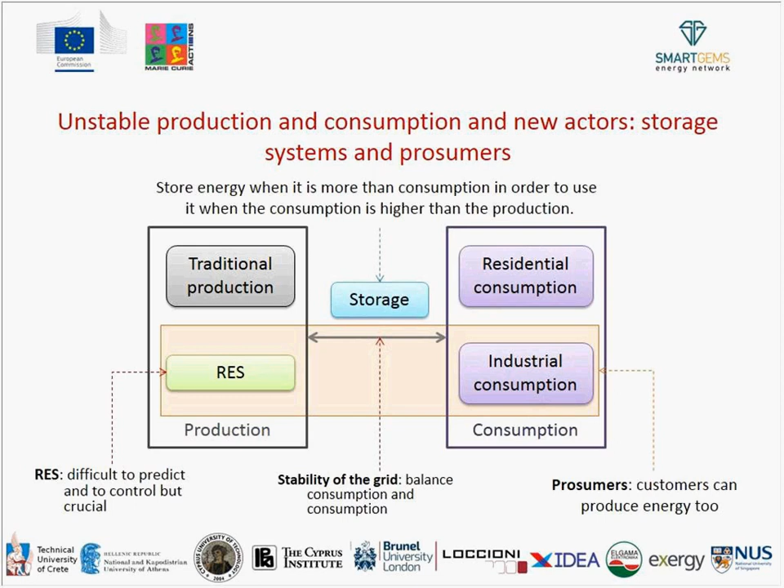There's also a new actor in this scenario, that is storage system. We are used so far to have a flux of energy, like from production to consumption. Now we have a sort of lung in the middle, so we can produce energy, we can store it and keep it, take it whenever we need. So there's a new actor also to include in this scenario. So smart grid is something that is completely different from the scenario of energy that we have seen so far. That means that we need to consider this new situation and to analyze all the actors and all the tricky situations that we need to face.

So why is it important, this operation part in the operation of smart grid? As I said before, the difficulty in planning in advance the production and consumption. Renewable energy sources, loads, it is difficult to forecast in advance. That means that it is very difficult to plan and to control in advance the generation and the consumption of electrical energy. But we need to balance consumption and production for the grid stability that must be guaranteed. And also we have this new actor, the storage system. So not only producing and consuming energy, but storing: battery, thermal storage, or hydro storage. Still, it's a new actor, this storage system.

Another key factor of this optimized operation is that we are having systems and assets connected to a microgrid that have different dynamics. For instance, if you consider a lithium battery, it is very fast. The dynamic is very fast. But if you consider an industrial consumer that is producing something linked to iron, for instance, the dynamics are very slow. But you need to control all these systems. So you are linking and connecting and controlling systems with different dynamics, and you need to include all of this.

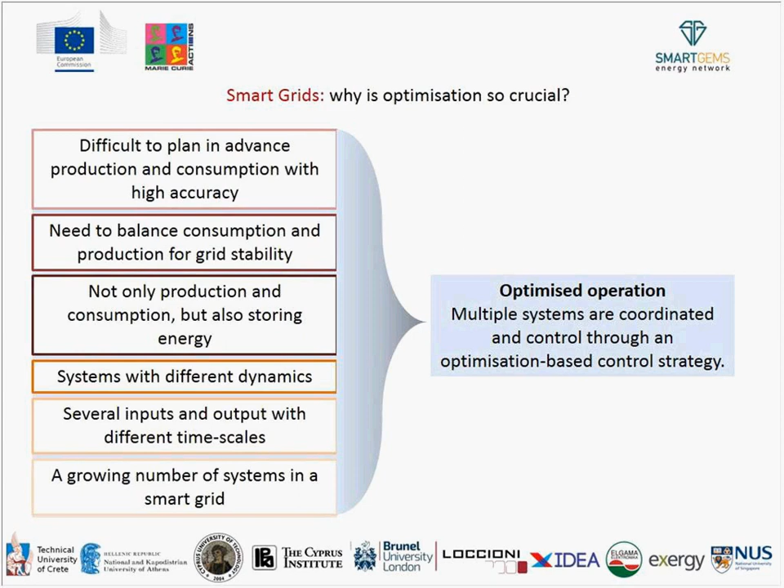So far, what have we seen from an industrial point of view? What is happening? What is the market proposing from an optimization point of view? I was at a fair 2 weeks ago in Germany, and there the focus was on optimization. So many companies were proposing optimization-based products, and these are the main areas that I've seen at the fair, and also that I've seen so far working in the company.

The first area where people are focusing a lot on optimization is, of course, trading, because they see the highest revenues, trading and bidding energy based on a pure financial optimization based on the market price. That is the first area of optimization. Why is it related to smart grid? Because you are trading energy produced or consumed by assets in a microgrid. So that's why trading is still connected to smart grid.

Then there is EMS, the energy management system. You can have it at the building level. You can have it at the grid level. That means that you can control the lighting system in a building, you can control the shading in a building, but at the same time you can control PV production of various buildings that you have connected in a smart grid. It has to be said that so far the EMS that you find on the market have a very basic optimization strategy already implemented.

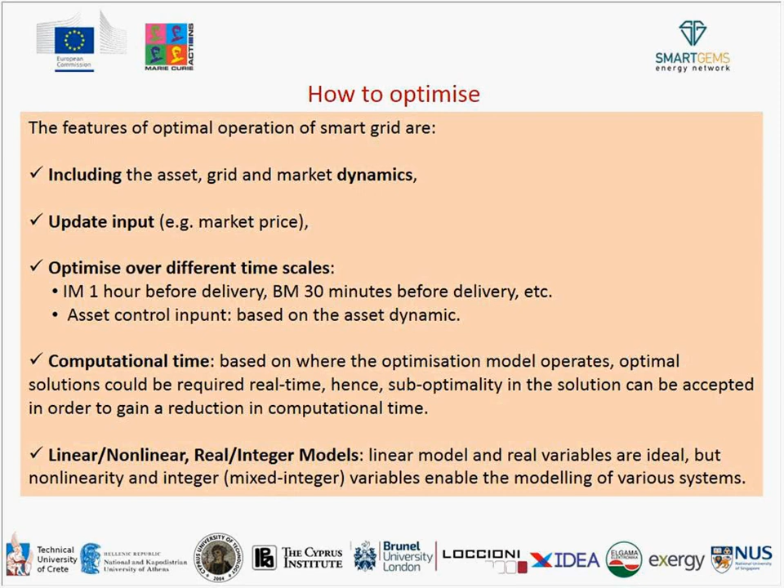At the same time, models and the variables that we are using for optimization, we are all thinking to go with the linear model and real variables, but sometimes that doesn't reflect the reality. So there are some assets that are not linear, and they require the mixed integer problem or integer variables, and that must be considered in the design of the optimization problem.

Modularity and flexibility again. We must be able to easily add and remove assets and constraints from the optimization problem. Reliability must be guaranteed no matter what, must be provided to the customer, and the control system must take care of this part.

There are also a few other considerations, related to a fully decentralized versus a centralized control strategy. That means that you can decide to control all the assets of the microgrid in a fully decentralized way, without a master control system but with a set of decentralized controllers. That can be done. Or you have a master that controls all the assets in a fully centralized strategy. It depends on the number of assets. It's still an ongoing debate in academia, but these are two areas to consider in designing an optimization control system for smart grid.

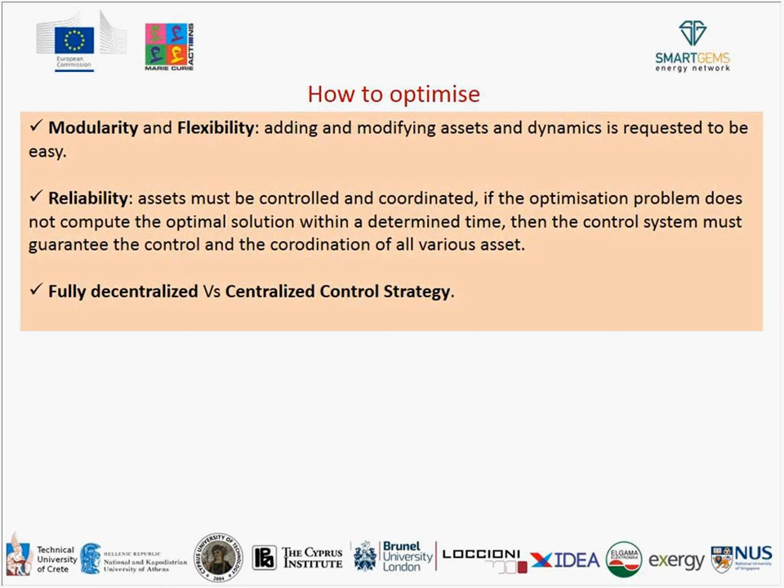That was an example that we have made here in Loccioni, just to show how you can integrate the market. In the optimization module that we developed internally, we were taking a real-time price from the energy market, updated every 1 hour. Then we were forecasting the customer imbalance volumes, and also the balancing market prices every 30 minutes.

So the idea here was to provide an optimal control signal to the assets that we were controlling, and also information to traders. We were not simply controlling the battery, but providing information to traders, something like, okay, if you bid this amount of energy now, you're going to earn X euro, but if you do that in 1 hour, our forecast suggests that you might earn something more or something less. So the final decision was taken by the traders.

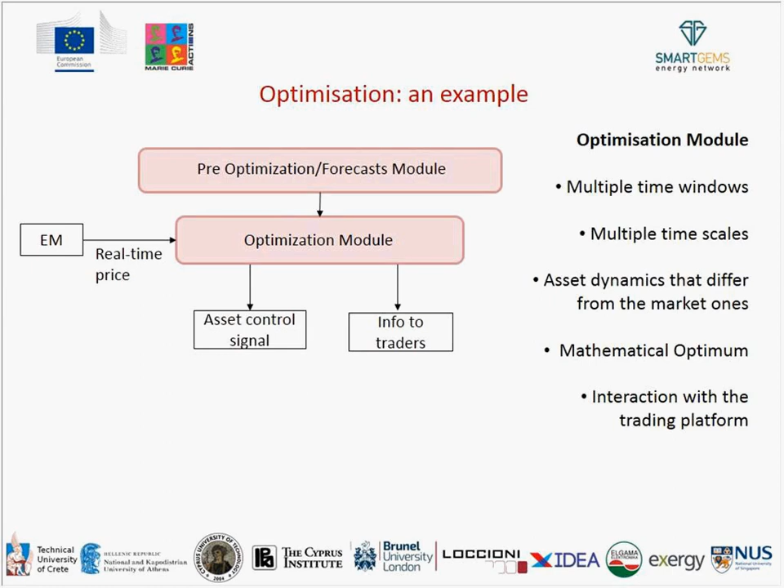And that's also a key part of smart grid. I'm going to talk about it in the next webinar, because humans and the interaction with humans must be guaranteed and taken into consideration when designing the control system for a smart grid. So the conclusion is that optimization is very important, and at the same time, reliability and stability must be guaranteed, along with fast computation, modularity, and flexibility.

Academia is focusing a lot on this research area of optimization. The drawback is that sometimes we tend to have a too complicated problem that requires too much information at the beginning that customers simply do not have. They don't have the faintest idea of how to get this information, and they are not willing to look for it, especially when they don't see an immediate return on investment.

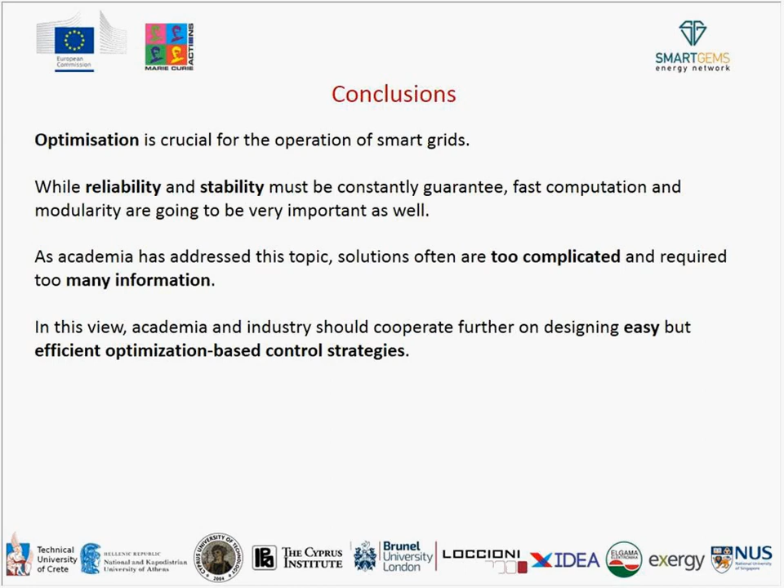I will continue this presentation by focusing on demand response as a prominent field in the smart grid concept, in the sense that it is a valuable tool and attracts a lot of interest from stakeholders on the policy and market side, and of course in research. We will see that quite a lot is being done in this direction, with some EU member states having made considerable progress and others still lagging behind. The aim of this part of the webinar is to provide the wide general picture of demand response and not a deep insight into the electrical energy market.

As in SmartGEMS we are more focused on the demand side management, but I think that it is important at the same time we acknowledge why demand response is valuable for all key market players. And questions like what is demand response and why demand response will be answered before going through some of the EU regulatory reforms and how they are gradually being reflected in various legislative acts. So primarily we will try to draw upon the actual progress of demand response in terms of the technical framework, but also we will describe some of the new business entities already developed in some countries.

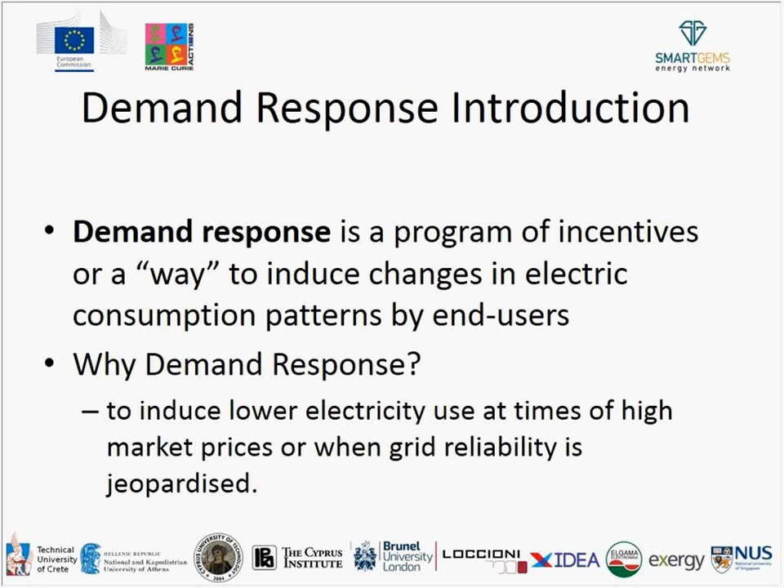And there are quite a few challenges ahead for the smart grid, and one of them is the penetration of electric vehicles, which, according to some estimates, could increase the peak demand by up to 40%. There is electrification of heat, which is another critical issue, and of course, increasing renewable energy sources engagement, and this creates volatility that utilities should deal with.

Unfortunately, here this graph is not working properly, but what I meant to show you is that this is a curve, the net load curve for California in January 11. We could see the difference between forecasted load and expected electricity production from variable generation resources. So in other words, this curve shows what the independent system operator must follow during the day, and it can be divided, as you see, in 4 segments, starting from left to right.

The first segment is an upward ramp of about 8,000 megawatts, and it occurs in the morning starting around 4 a.m. as people get up and prepare for their daily schedule, and goes until 7 o'clock. And then we have the second segment in the downward direction, which is sometimes described as the belly of the duck. The first segment is the tail of the duck, the second is the belly of the duck, and as we see, we have this in a downward direction, and it takes place after the sun comes up, just after 7 a.m. in the morning, when conventional generation is replaced by supply from solar generation resources.

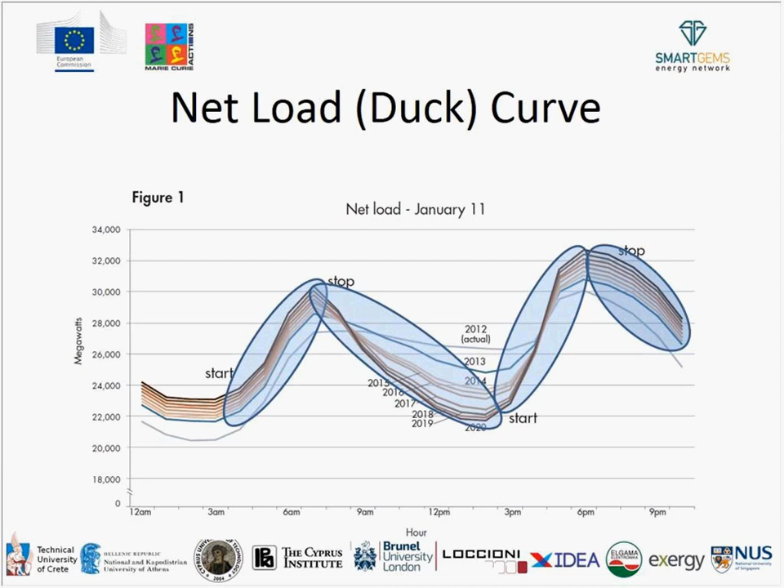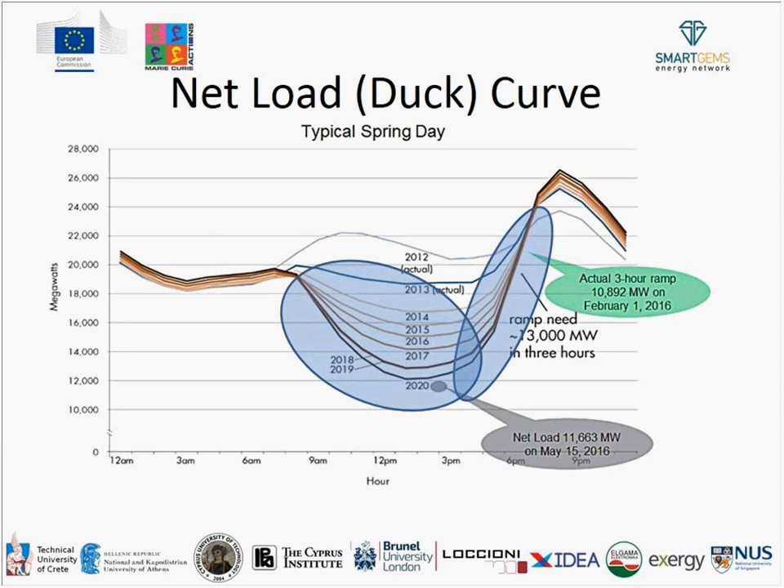And this is another example from spring this time, and again we see that according to the forecasts going to 2020, there will be a very high gap that the operator needs to fulfill as renewable sources are being increasingly connected into the grid. So the belly of the duck, let's say, goes down to a lower point. So the second ramp in the upward direction becomes wider. In this case, I'm not sure if the peak increase due to electric vehicles has been taken into account, but this is something that could make this gap even higher in the future.

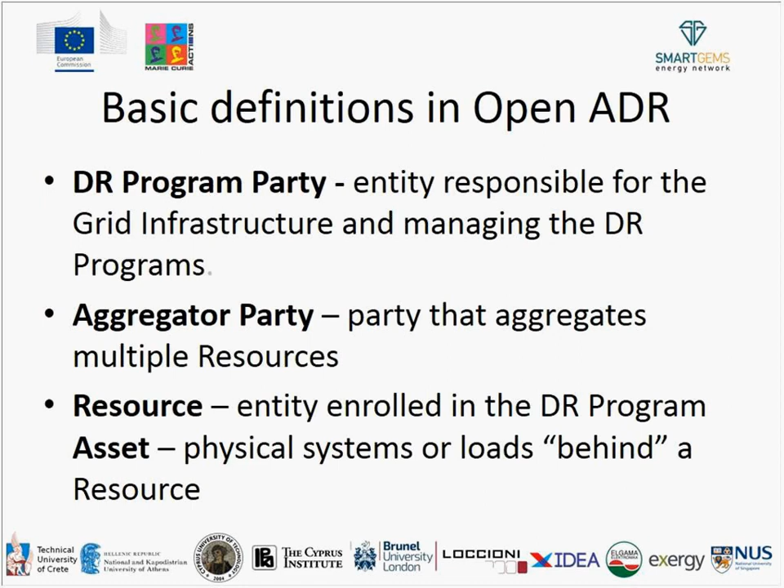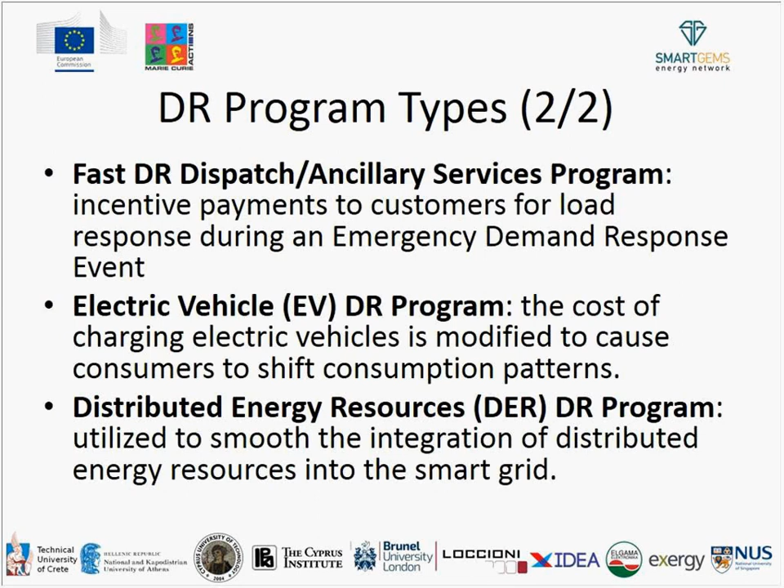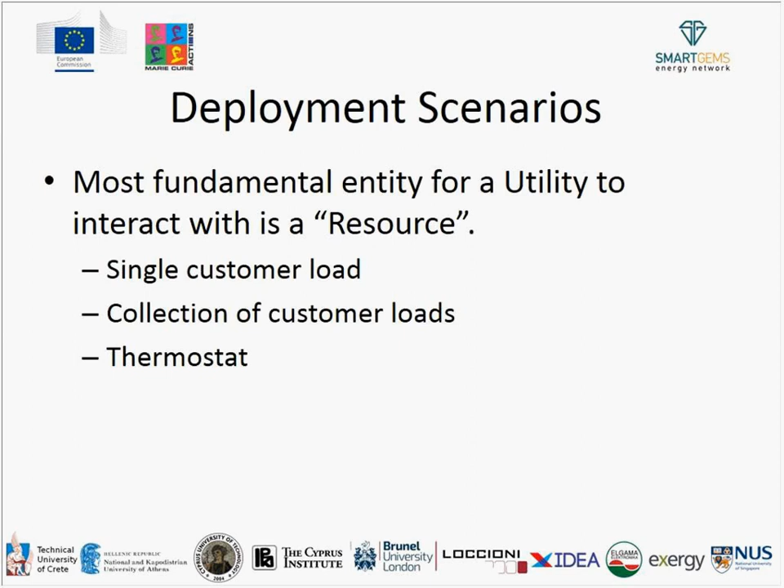In this effort to standardize, let's say, communication for demand response operations, various program types have been identified, such as critical peak pricing, capacity bidding program, thermostat program or direct load control, fast DR dispatch, which is about customers' response in emergency events, electric vehicle programs, and distributed energy resources programs. And of course, the most fundamental entity for a utility to interact with is the resource, which could either be a single customer or a collection of customer loads, or even a thermostat.

And this is a simple deployment scenario between the Demand Response Program Party and the Resource Party. So we have the Resource Party responsible for enrolling its own resources into the Demand Response Program, and the grid infrastructure then, via a communication node, which here is called VTN, Virtual Top Node, interacts with another communication node that resides in the demand side infrastructure. And examples of this scenario would include commercial and industrial buildings that may install a gateway, and when a signal is received, it's simply translated into some other protocol and forwarded to the load controllers, the building management system, or the energy management system.

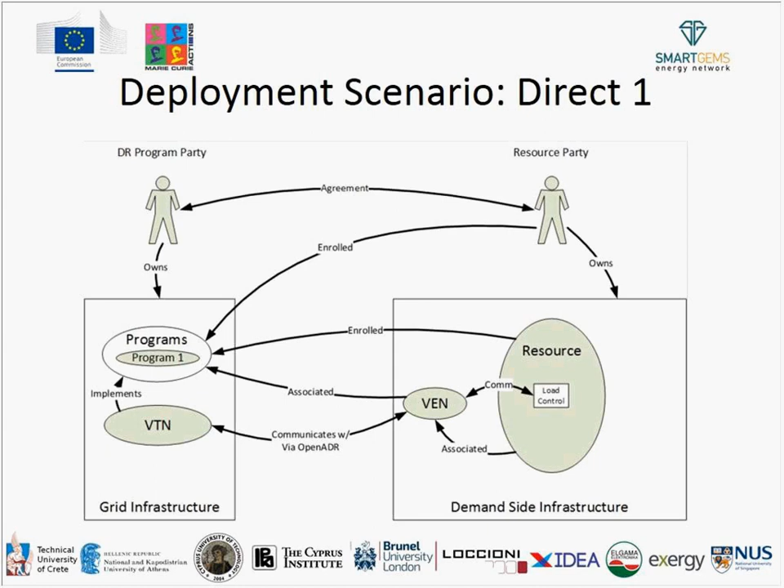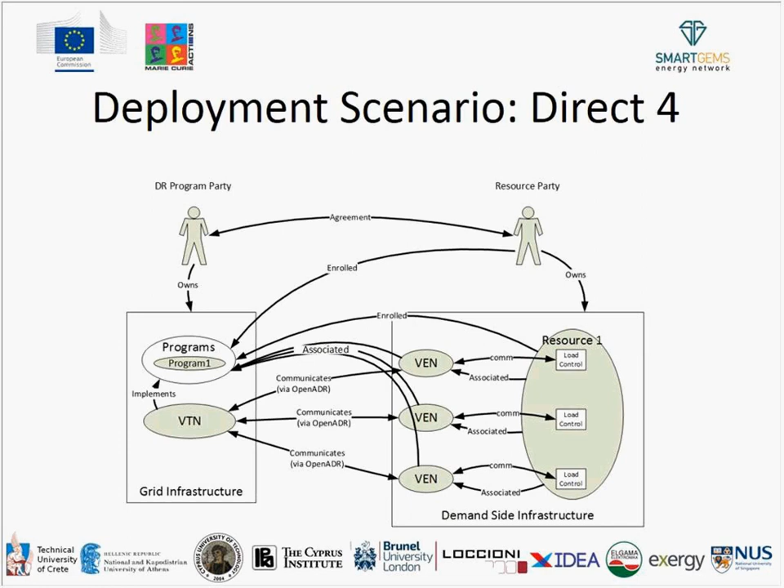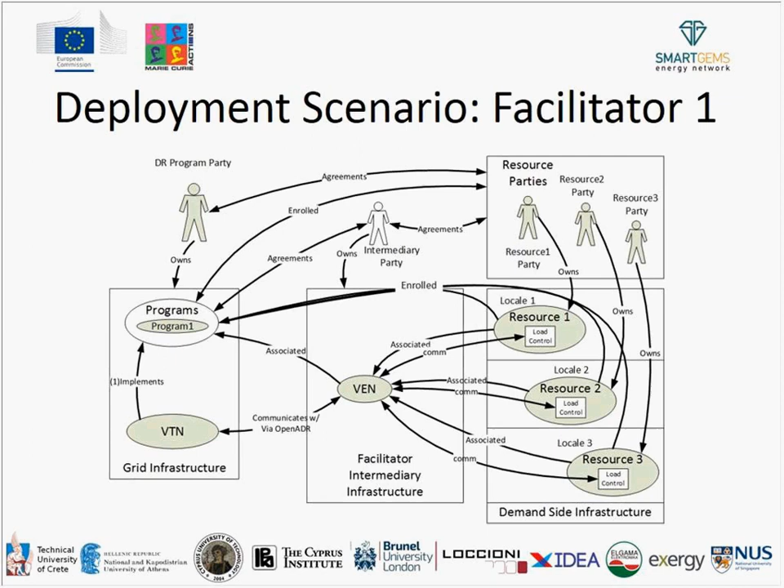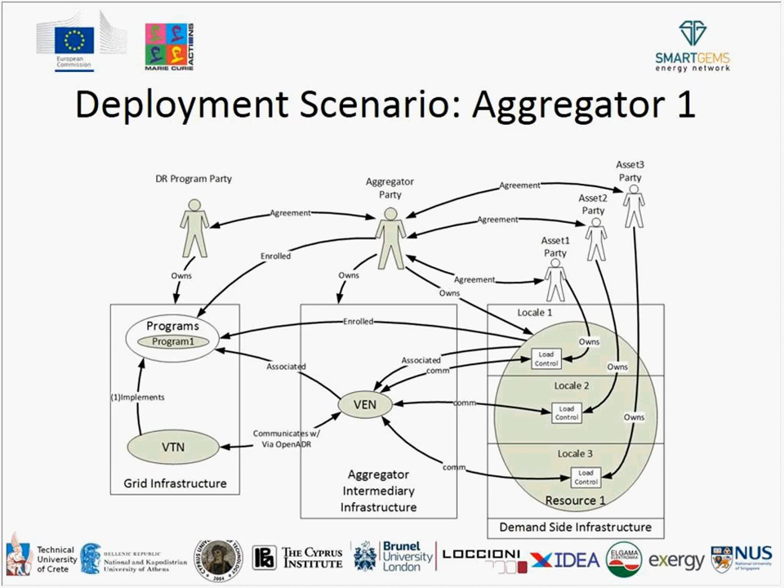Okay, as a conclusion, demand response offers the technical and regulatory framework for higher efficiency, inclusive participation, and operational transparency. And there is a lot being done in this direction. Research, innovative products, market-oriented efforts, and targeted policies which gradually drive electricity markets closer to more elaborate and wide-scale demand response in the foreseeable future. This is where my presentation ends.

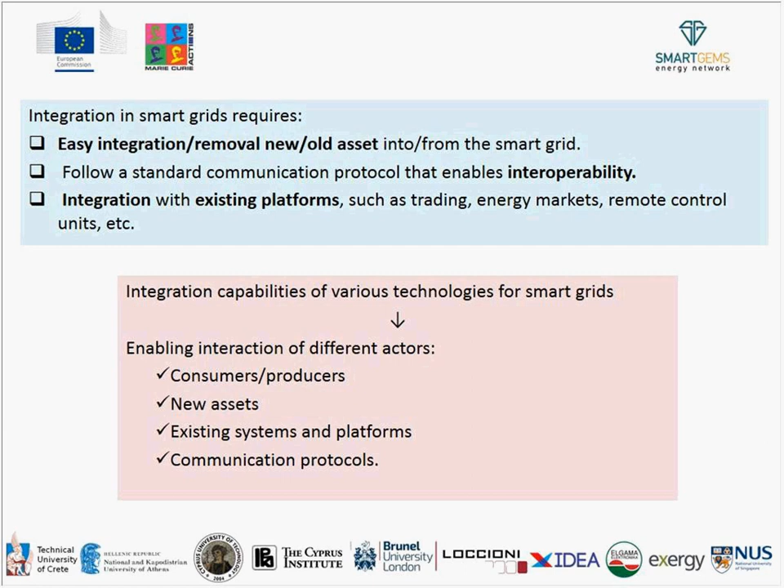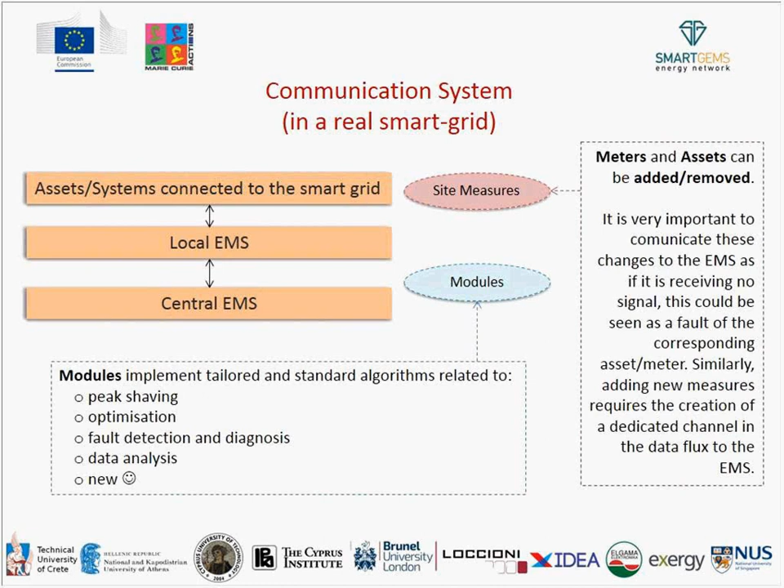Second level, local EMS, battery management system. These are the management strategies that are implemented at asset level, locally. And then there is the upper level, the central EMS. From the website, remotely, you can control the microgrid, you can select the control strategy that you want for the battery, for the hydro production, or you can perform a data analysis, you can integrate with the markets, you can integrate forecasting too, and this has been developed internally by Loccioni.

So it is very, very flexible, modules can be exchanged from central to local very easily, and it can be accessed from web, but also from mobile, so from a tablet or a mobile you can have access and control the assets of the microgrid.

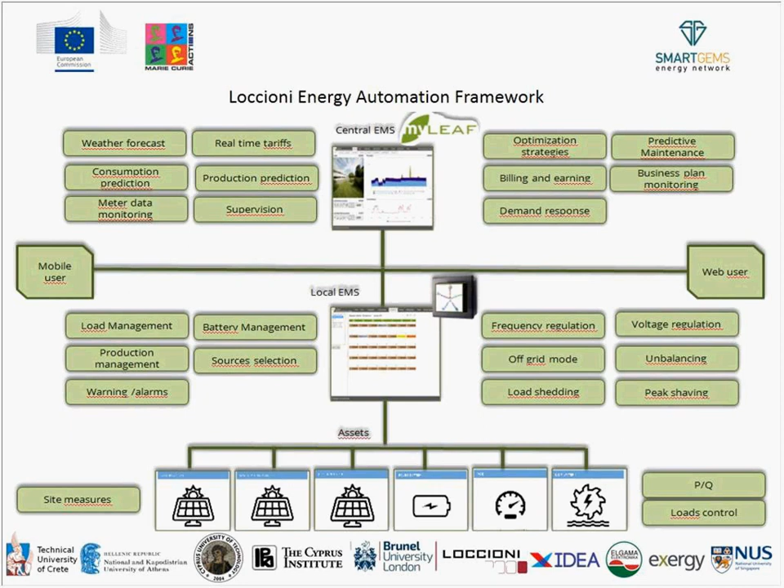So far, which kind of integration capabilities, let's say, which kind of knowledge is requested in this phase in the communication system? Of course, a good knowledge in ICT, information and communication technology, in coding, because the framework has this structure also on cloud, so coding is very important.

You need to know the hardware, so the meter that you are installing, and also electrical and thermal equipment. You cannot measure something if you don't know how it is done, because there might be a risk that you are going to install a meter in the wrong part of the heat pump or the boiler or the battery. So you need to know what you are going to monitor and to control. So these are the main competencies that are requested at this stage of the integration, that is the communication part.

Then we have the control system. We need a control system to control all the assets and to coordinate. We can use the optimization-based controller we have seen before. We can implement demand response. It would be at this phase of the integration.

We have the EMS that has been developed internally by Loccioni. That means that we can, for instance, control the battery for peak shaving. We can use the battery for increasing self-consumption. We can go on island mode. We can use the thermal storage to store energy during weekends and use it during the weekdays.

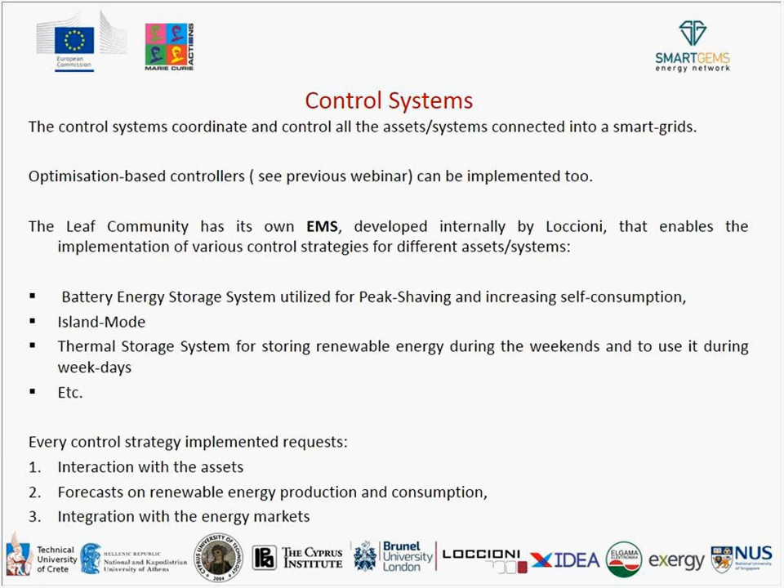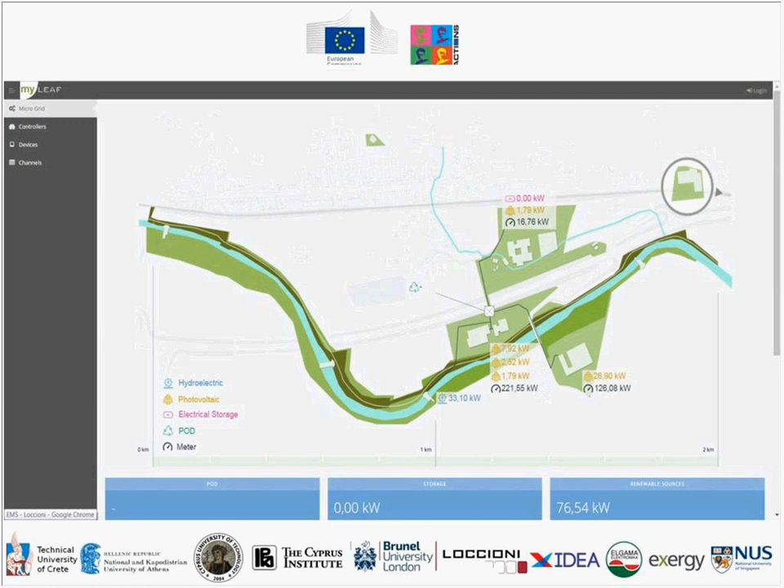And another aspect, as Nicholas also mentioned before, is the role of aggregators. That's something that must be included in the design of the control system, and it is very important in the area of integration. Imagine that we have n systems in a microgrid or smart grid. There might be traditional production, consumption of a house, of companies or industries, and then we have batteries, for instance. Instead of having n systems, we have an equivalent system.

So we aggregate all these systems into only one. That means that the EMS, the energy management system, controls the equivalent system by sending it the optimal control signal, and then it's the equivalent system that disaggregates the control signal and controls all the systems below. This is called aggregators, and it is a form of integration.

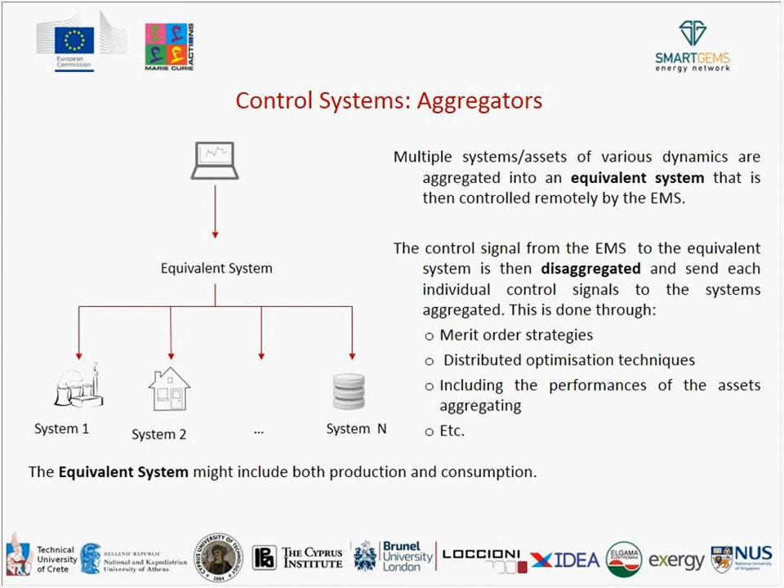So we need to know the actuators to control the assets. We need to also know how these assets are done, so we can add some mathematical modeling competences too, also to define the optimization problem. The EMS is controlling the assets also in response to the energy market, so the energy prices, and also some data analysis and control theory, because these are models that can be implemented at central EMS level of the system. So these are some extra capabilities that are requested in the control system part of smart grid.

Another aspect of integration and smart grid is the human interaction. We cannot think to integrate only things in the smart grid; we need to integrate also people into smart grid, not only hardware and assets and batteries, production and everything. And that's something that must be considered, because the world for people is changing completely, the idea of energy, so we need to integrate them in this process.

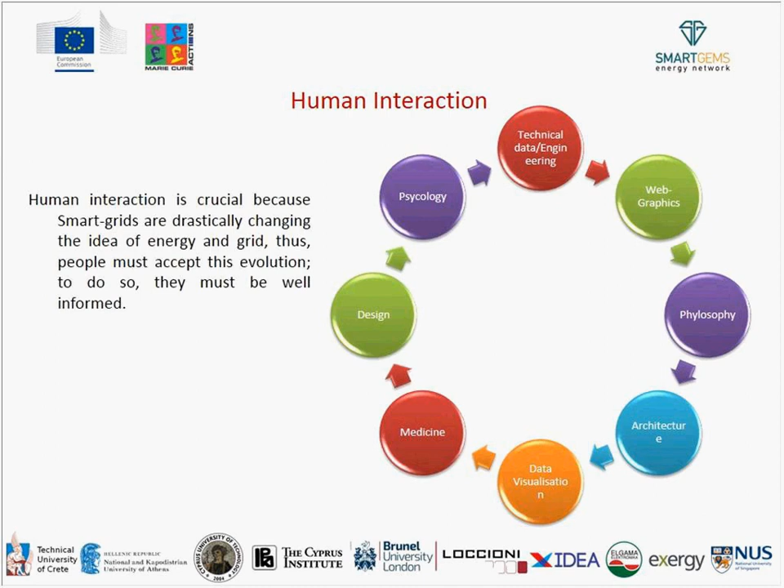So which kind of competencies will that be? This involves the design, psychology, the engineering part, of course, web graphics, philosophy, architecture, data visualization also, and medicine too, related to health and everything. So an example, for instance, is in the MyLeaf that we have, that some of you have already worked on. We focused a lot on how to visualize the desired information in a proper way. So it's data visualization, but at the same time it's also web graphics. Try to provide information in a clean and easy way, but effective.

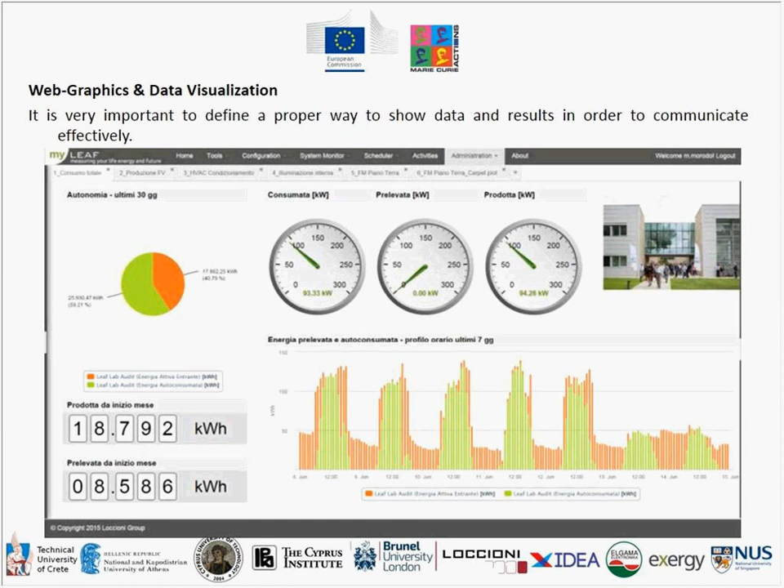So this is a new aspect regarding putting the people in the center of the smart grid, because if they are involved, if they are informed, they are going to accept easily this new scenario in the energy world. We have also this leaf meter. That was something that Loccioni has done many years ago, and the idea is to bring this pot. It's a huge pot, like 1.5 meters high, and you bring it to the customer, and on that display there, the main measures are displayed.

So people are working there, or we have one of the 3 centers at the hospital in Ancona. So people are working there, but also people are visiting, and they can see consumption and production of the building in real time. And they're informed. They have real-time access to the energy fluxes of the microgrid of the building, and it's something linked with design, but also how to make people more informed and more involved in this scenario.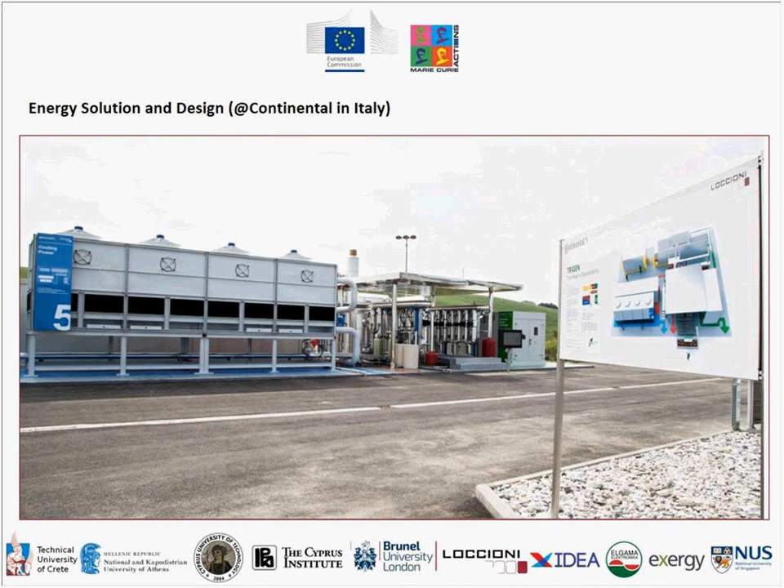This is some work also in Italy, the company, and what we have done, we have created a sort of path from different stations and solutions that we have provided to a customer, like people are guided from one installation to another, and so they know exactly what is happening, they know why those installations are there, and they know what are the benefits of these works. So here, yes, it's the part of natural gas, and the cogeneration is still the same installation that I've mentioned before.

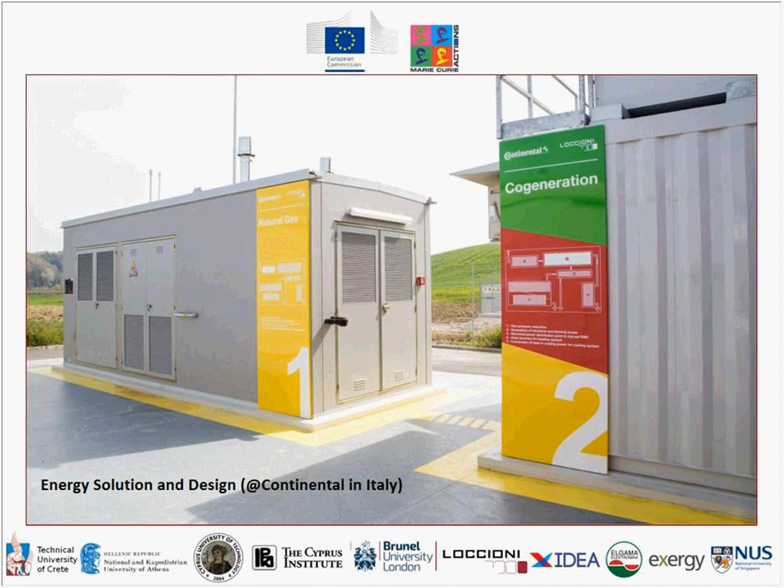And this one is a container that has a lithium storage inside, and that is for the research center north of Italy. But the idea is that we do not provide a raw container like that, because this is a research center and they have to test how a battery could work in a smart grid. So if it's going to work and then you're going to bring this into a real city, how can people react to a raw container like that? So it's better to make some windows and some glass doors, so people could see inside, and also some green LEDs outside, so people are attracted by this product, they're willing to know what is going on inside, and they're willing to accept it easily, because it's nicer than a raw container.

Because what we need to start to think is that storage, batteries and containers are going to be used more and more over the years. So we cannot think that we will have lands full of raw containers like that. And maybe we should start to think about how to make these lands of containers nicer, because otherwise people are not going to accept it, they're not going to be interested in what's going on. So they are not willing to understand if they really need this kind of battery or not, or to accept this transition into the new energy scenario.

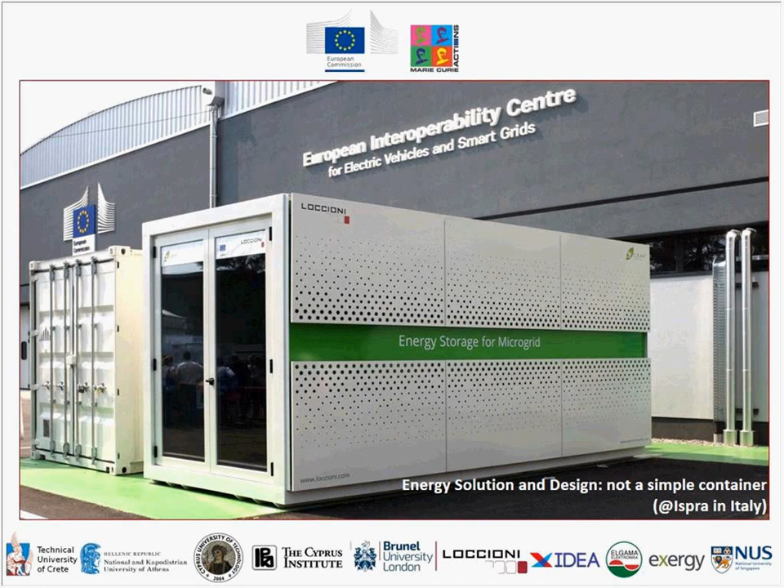So to the competencies that we need, we should add design, graphics, philosophy and psychology too. You need to talk to people. You need to put the person and the people in the center of the smart grid, and make the person accept this transition, this new scenario. But as well, we need to add also methodology. So like define a standard how to proceed in the integration of all these competencies.